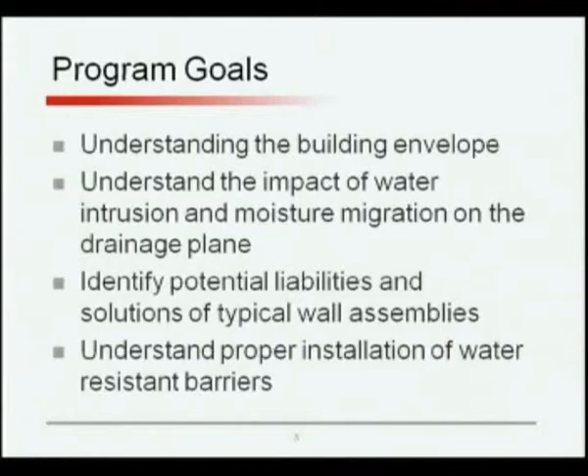Our goals today: help you understand the building envelope, understand the outside package of a home or any building, understand what water intrusion and moisture migration do to us today. Again, old houses, walls were kind of empty, a little bit of water might have leaked in, plenty of air blew through it and dried it right back out. The house was very sort of resistant to that, didn't care. Today it's a totally different deal.

Identify the potential liabilities and solutions for typical wall assemblies that we see when we're putting a home together. And really overall, understand the proper installation of a water-resistant barrier, or what we call a weather-resistant barrier, or WRB. I'm going to let Jim take over and talk to you a little bit about that building envelope.

Great, thank you, Pete. All right, a brief introduction to myself. I understand that Scott this morning had an introduction with our bios for both Pete and myself. My name is James Knapp. I work with Hallmark Building Supplies. Hallmark is an integrated system of sales, marketing, and distribution. In that company, I'm the Vice President of Construction Products. I've been with Hallmark for 22 years.

As a salesperson, I was one of the first persons in this market to have the opportunity to educate the building trade on using a house wrap. Back about 22 years ago, I can give you some data because I remember what it looks like. Less than 2% of homes were actually using a house wrap. A small percentage of that were using felt on the walls. Obviously, felt is used under the roof. Pete is going to kind of lay that out for us. Now, house wrap is standard building practice. It's just a standard building practice.

And through that process, we've educated a lot of people in the trade, including many of you, on how to properly install these products. The key to those products is being able to use a system of products that are engineered to work together, that chemically bond, to create a monolithic envelope which protects the builder's home, which limits the liability of everybody because it reduces callbacks.

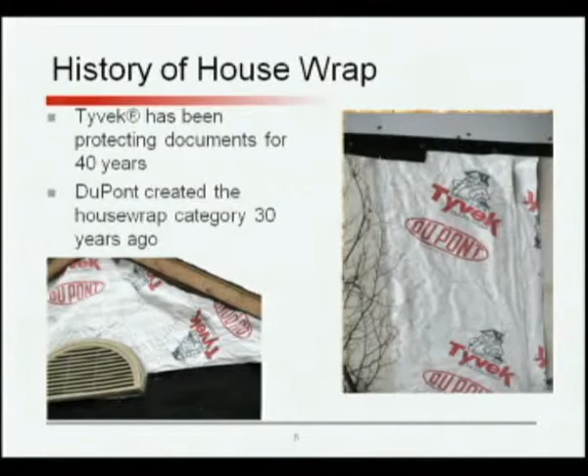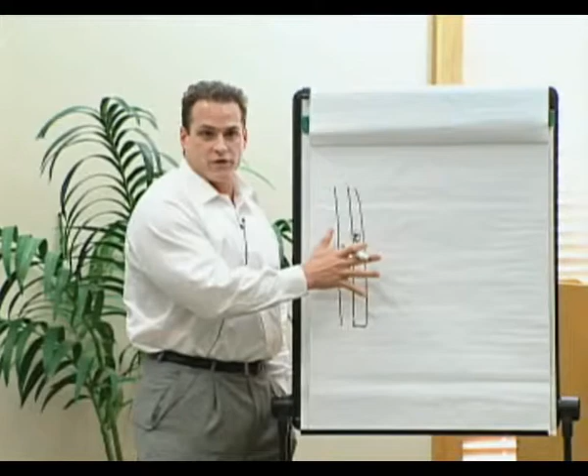Now here's where it was created. If you think about a wall, and this illustrates my wall, the house wrap category was created to protect that wall from outside air infiltration. And the belief was that if we wrapped our exterior wall, which was defined as our building envelope, we could protect the wall from air infiltration, reducing drafts, making the home more comfortable to live in by stopping air infiltration at its source, making the energy bills for the consumer a lot more comfortable to live with.

So for the last 30 years, we've been saying that this house wrap category will protect your building envelope, your wall, and reduce air infiltration. About 10 years after that, through innovation, house wrap manufacturers started seeing, since the number one callback in the building industry is water-related issues, that they could take this house wrap product, re-engineer it, and create a product that could resist air, resist water, and because it's moisture vapor permeable, which means it allows moisture vapor in a molecule form to pass right through it, it can breathe. It can stop air, resist water, allow the wall to breathe if moisture does get in, and we would have an air-water barrier and be able to solve issues for the building trade.

So in the house wrap category, really the job of this WRB is to stop air, resist water. But when you're stopping air and resisting water, the reason you don't want to wrap with a plastic film is it needs to be permeable. The higher the permeability, the greater the confidence in the building trade that moisture, if it does get into the wall system, is going to be able to escape.

Okay, so DuPont created that product. Now here we are today. There are about 70 products in the marketplace, choices of house wrap to wrap the wall. But here's what we need to think about. When you're looking to wrap your wall with a house wrap, a WRB, to create the drainage plane, the first thing you have to ask yourself in the trade is what type of exterior facade do I use? Because depending on the facade, house wrap manufacturers today are bringing more to you than just a house wrap. They're bringing products that actually provide thermal performance.

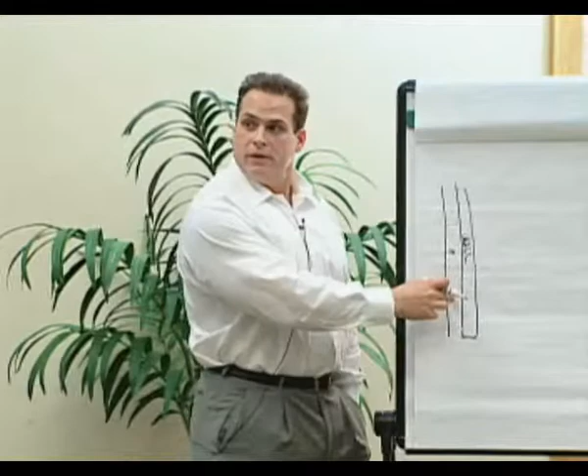Okay, the building envelope. For over 30 years, the building envelope has been defined right here, the wall. But actually, I can show you where it's going. I sit on the council for the leading manufacturer in this category of innovation and technology, and I can show you where it's going. Because for over 30 years, we have defined the building envelope. We taught the trade the building envelope was the wall. And we said, based on your wall, you need to protect your wall because it'll limit your liability by reducing potential water callbacks.

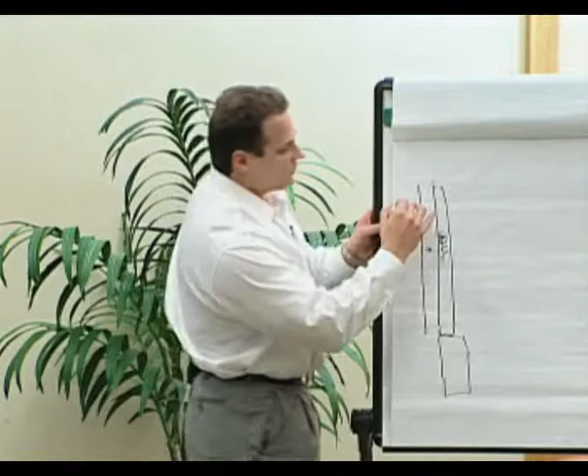Actually, now what we're realizing is that you guys are building a home as a system, or a building as a system, whether it's residential, new construction, remodel, or commercial. And as we look at that system, we realize that you're putting this wall on a foundation, and then this wall is also being capped with your roof. So we've got a foundation, a wall, and the roof. Here's where the category of WRB is going: weatherization systems.

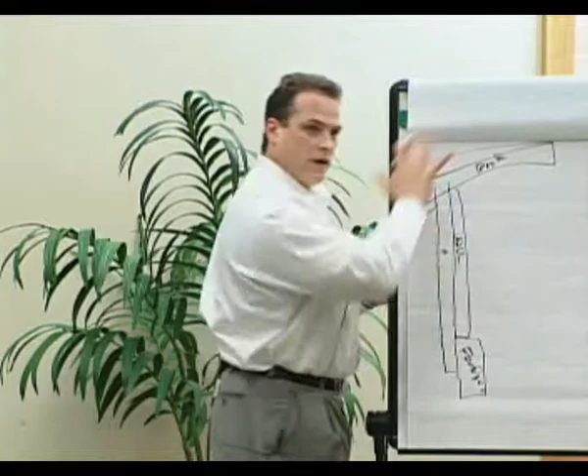For so many years, we told you, use this house wrap and it's going to protect all your callbacks, help you build a better wall. That's true, but I think where you're going to see this thing going is the building envelope, first of all, is going to be what is traditionally defined right now as the wall, tied into the foundation, the wall, and the roof. The entire building is going to become the exterior building envelope.

And where you're going to see these manufacturers start to bring innovation of products is based on the system of products that you're using. They're going to give you choices, like they're doing for the wall, to tie your foundation to your wall to your roof, and they're going to redefine this as the building envelope, the entire foundation, wall, and roof, and give you a system of products.

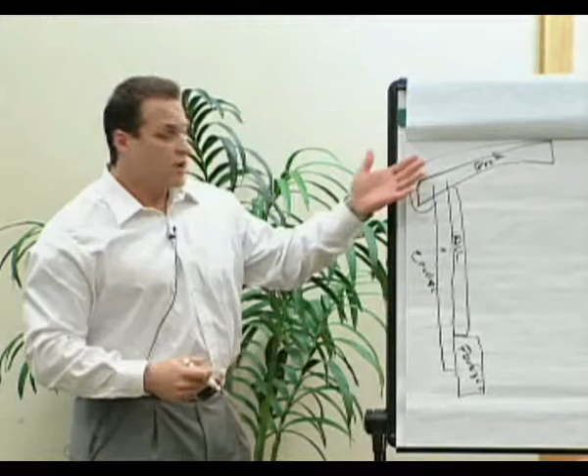There's already manufacturers that are bringing technology from Europe, and technology in Europe is actually using house wrap products that are metallized, thermal performance, because all walls in Europe are built with stone. They don't wrap the wall because it's built with natural stone, but they use this sealed attic ventilated roof as one of the first innovative products that came to protecting heat loss, energy conservation, moisture issues, ice damming, solving problems for the building trade. So again, the envelope is going to go from defined as the wall to the foundation, wall, and the roof.

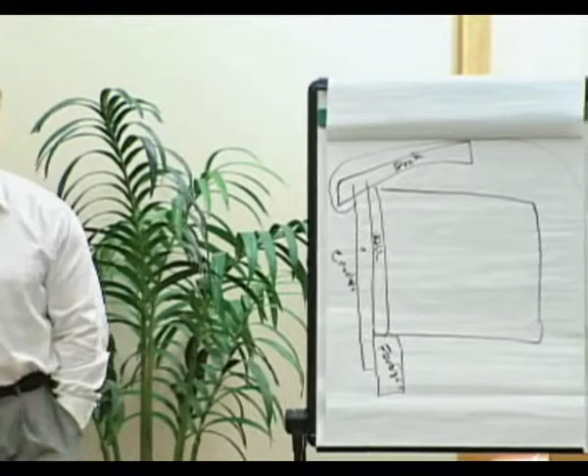Now what's been interesting here is what we realized is within this wall, the building industry is actually putting windows and doors. So for so many years, we would tell you, use a house wrap, wrap your walls, and we're going to protect air and water for you. And then make sure all these different people in the trade that touch that exterior wall properly install this stuff, which is really where Pete's going to tee this thing up and show us the proper best practice in installing these products.

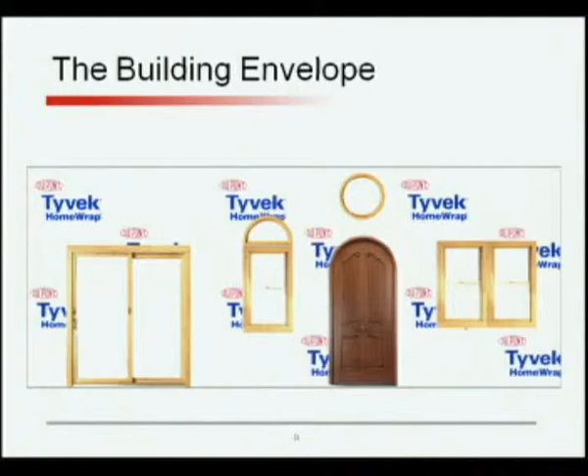But when we look at this, we realize that you guys are putting doors in, and you're putting windows in, windows with circle top or elliptical top or circle windows, and you're actually putting penetrations in that exterior wall. So house wrap manufacturers that once just brought house wrap as a WRB are now bringing a system of products. So as you look at your windows and doors, there's some questions that you have to ask before you just say, I'm going to use this flashing product, or I'm going to use this caulk to seal all those penetrations.

Because here's what's interesting. The average 2,000 square foot home has over 1/2 mile of gaps and seams where all these building materials come together. Because of pressure differences on the wall, air and moisture are going to pass through those cracks and seams and get into the wall system, outside of the penetrations that we're going to make here.

By choosing the right system of products from the top down of this building and protecting that envelope, when you get to your windows and doors, before you just choose a sealant or a flashing product, what you want to ask is, what brand of window am I using? What's the proper installation method for that brand? What's the width of my wall? Is it 2x4? Is it 2x6? Because that will change the window pan or different products that you may want to use.

And there's some windows that actually have a nailing fin. There's some windows that do not have a nailing fin, like a brick mold window or a brick mold door. House wrap manufacturers have actually innovated flashing products that create a window fin by simply using a flashing product. There's a product called Straight Flash VF that actually creates a window flange with a non-flange window and door.

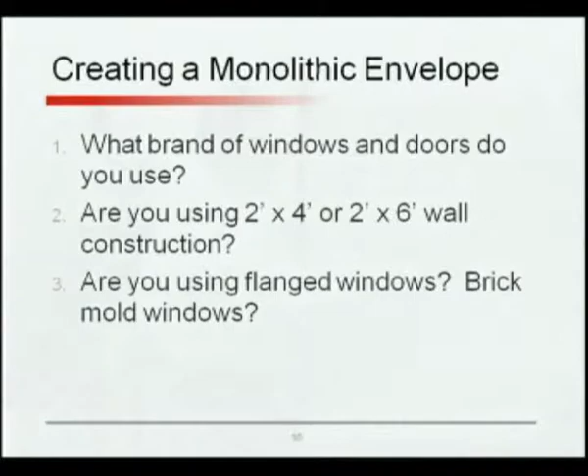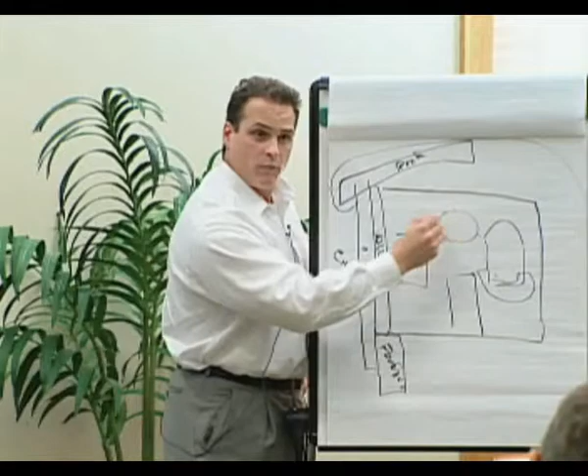There's three-dimensional products that can actually seal the bottom part of your window, because if water ever gets into a window opening, where do you think you find it? In the corners. So you can use a three-dimensional flashing that can literally protect the inside, the bottom sill, and the face of the window. Bendable, moldable flashings can do this circle or elliptical top window in one piece. They have flexible materials in them so you don't have to cut and piece tin flashing or other flashing materials.

You can, in one piece, go around these types of applications, protecting that. Now the value here, here's where I'd like to leave this part of my presentation and turn it over to Pete. Some things to think about. The building envelope is more than just the wall. Think of your foundation, your wall, and your roof as a system.

We all know that. But choose a system of products, because you can take a house wrap, a tube of sealant, a roll of tape, and a piece of flashing product, and you can put them together. But here's the key. They're not engineered to work together. Choose a system of products that are engineered to work together chemically, that chemically bond to one another, that protect your entire building envelope, that the manufacturer is going to warrant for 10 years, protecting you from liabilities of moisture intrusion, at the end of the day, saving us some callbacks.

Okay, I'm going to turn this over to Pete. He's going to walk us through the drainage plane and the proper installation of these materials, because that's the key to making all of this stuff work. Thanks, Pete. Thanks, Jim.

Like Jim said, a product alone can't solve a problem. And like I was talking about, years and years ago you had fewer people involved in the construction of a home. You typically had a master craftsperson that understood various phases of construction and could handle the transitions when different materials went together.

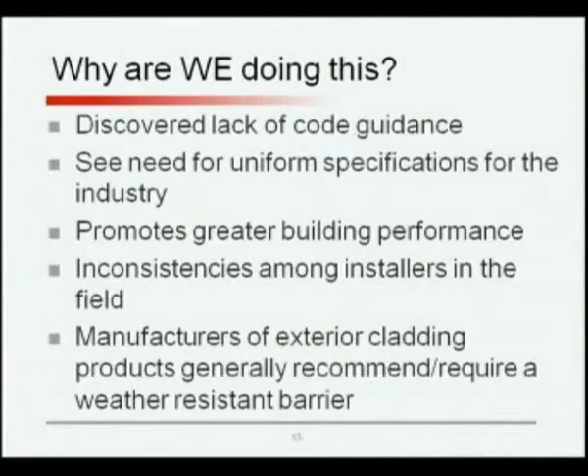Why did we do this? We're going to go through a series of slides from a panel I sat on here at MBA 2 years ago, where we put together what we called a weather-resistant barrier guidance document. We submitted it to the Department of Commerce in the state of Wisconsin because they were considering adopting some code language to mandate a weather-resistant barrier. Is there a weather-resistant barrier mandated by the Wisconsin Residential Code right now? Who knows? There is. You have to have a weather-resistant barrier behind your siding or cladding materials today.

Do you know what the acceptable form is? We should know because we see people doing it every day. Foam sheathing with taped seams is okay. And what we decided as a panel was, we as builders have seen enough problems with foam sheathing with taped seams, because tape doesn't stick forever in those assemblies, that there probably needs to be something more prescriptive. There's been nothing adopted by code.

Commerce is considering adopting some of this by code, but the next series of slides is really what we put together and presented 2 years ago, really best practices on how to create a weather-resistant barrier. There's no guidance in the code right now. There's no uniform specification for the industry. We wanted to make buildings perform better.

Big thing, inconsistencies among installers in the field. We've got lots of different people involved in building a house. Depending on which state you go to, it gets even more specialized. You'll have one person put the studs up, one person put the sheathing on, another person put the house wrap on, a fourth person put the flashing on.

And again, the next guy in doesn't know what the last guy did or really isn't concerned with what the last guy did. The next guy in's here to put his stuff on, and that's where we get into problems because there's not one uniform understanding about how all these exterior products interact. Manufacturers of exterior cladding products generally recommend or require a weather-resistant barrier.

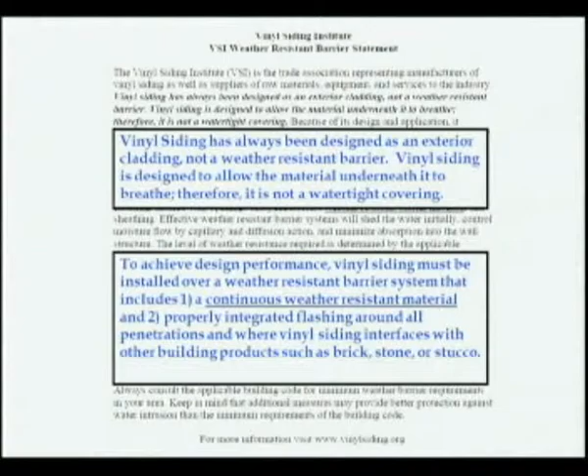And so anytime I get a service call and a customer says we were having Thanksgiving dinner and a storm blew in and my dining room window is leaking, well, we'll send somebody out. They just lean a ladder up on the outside of the wall and try to caulk the siding or anything to the exterior. They're not attacking the problem where the problem exists, because the cladding is going to leak.

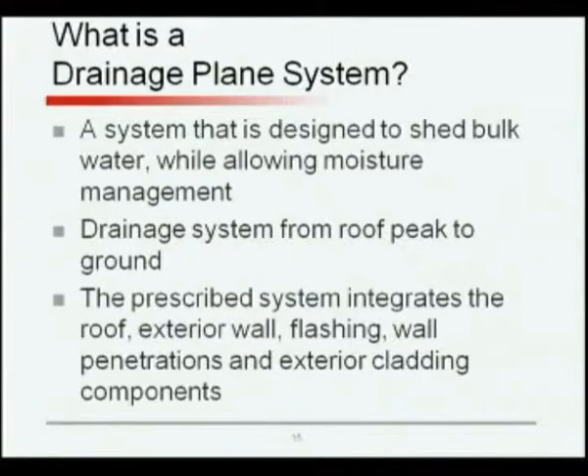What's a drainage plane system? A system designed to shed bulk water while allowing moisture management from the roof peak to the ground. Like Jimmy said here, for years and years and years, we've told you how to be a smart builder by showing you a wall and putting some wrap on the outside of it. Problem with those homes is they're really dark inside. We're not dealing with reality when we draw a wall this way. There's holes in that wall, and customers pay more when they're beautiful looking holes in the wall. We've never taught you how to do that.

And there's a place up here water's going to get on, and there's a place down here water's going to get on. So a system from the roof peak to the ground, integrating roof, exterior wall, flashings, penetrations, and cladding components. If we could build a wall like this and put some paper on it and never touch it again, we'd have leak-free homes. The problem is we build that wall and then we gash it full of holes. And it's how do we deal with the holes and how do we anticipate what the water's going to do.

That's where the water's going to go in. Came in our dining room window. You know, it didn't just magically appear in the center of a wall where the wall was nice and solid and built like this. It came in through the holes. We got to manage the water around the holes. Good weather-resistant barrier, dams or obstructions, free flow of water, weep holes in masonry. These are some of the features we're going to talk about as I get into some of the picture slides to show you how this stuff works.

Types of building wraps. I just want to say this. If you want to know how a drainage plane is supposed to work, just get up on the top of the house. It amazes me that we understand so well in Wisconsin how to make water hit the top of a roof and get from there to the ground. And suddenly we take that roof and we make it a vertical plane and we totally forget everything we know.

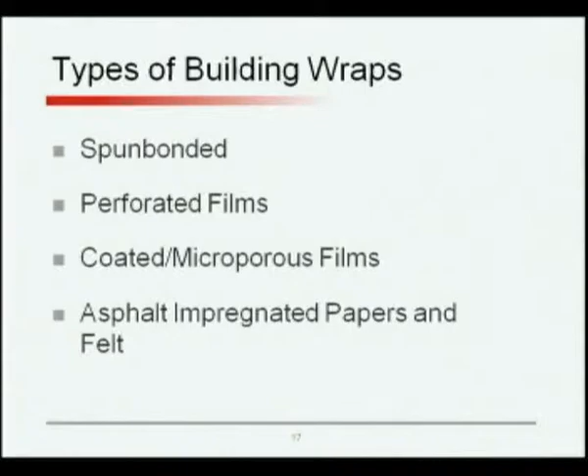What kind of building wraps are there? Again, we'll go back to this. Well, why house wrap? Well, because houses are put together, the walls are sheathed with pieces of stuff. It used to be shiplap or tongue and groove, lots of pieces of board on the outside of the wall. Now it's pieces of OSB or foam sheathing, but they're separate units. They're 4x8 sheets, and we need something continuous. We need a plane. We need a flat surface for water to run down and not get into the building. So the best way to do that's with some sort of wide or long paper or rolled material.

So that's where felt paper came in. 3-foot rolls, put it on. Again, as long as you shingled it properly, we're okay. And if you're going from the bottom up, you can generally achieve that proper shingling. So asphalt impregnated papers and felt, still a viable material. We're using it on our roofs. We're getting our roofs right. We usually don't have a lot of roof leaks around here. We have a lot of wall leaks around here.

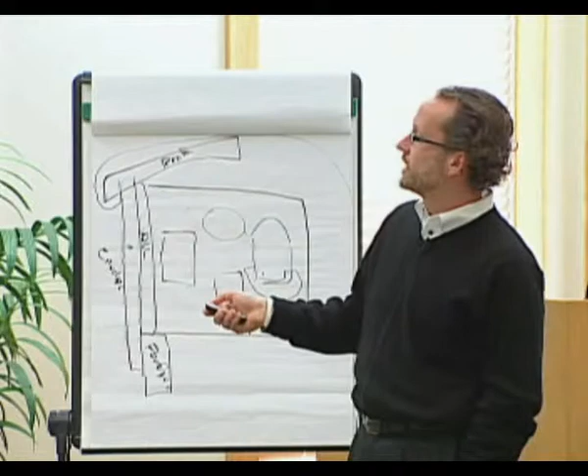Spun bonded house wraps. Tyvek happens to be that category. There are a lot of perforated wraps out there that try to address some issues. And then the coated, like metallized or microporous films. So there's lots of different wraps you can use. I recommend using a wrap. The problem with foam and tape is there's not really any tape that stays stuck to foam in the long term. And ask any sider who's gone back to repair a window leak on a house that's got foam and tape, and the tape is all curled up inside the sheets of siding. Presto.

Material selection and wall design, first step. Here it says, the best workmanship by the installer and the finest quality control of the general contractor will never rectify poor selection of materials and improper detailing. I agree with that, especially the proper detailing. Once again, the finest selection of materials, the most premium paid for house wraps and their integrated flashing systems and their high-tech sealants that chemically bond. If we don't know how we're putting them together, it's junk. Or if we don't use the whole system.

I can't tell you how many job sites I've been on, and there's a couple of rolls of some tapey-looking stuff laying in the back corner of the garage. The flatwork contractor gets there, throws them out in the snow. Well, what are those? What are they for? The building's already sided. We got guys smiling. You've seen it. You paid for it, too, right? You bought it in your bill of materials, and now it's out in the snow. Well, we didn't know what it was for. We thought it was extra. We didn't know.

If the stuff's not put together properly, you can pay all you want for a system. You can rip an ad out of a magazine on your way to Vegas this January and go, ha, that's what's going to solve my problem. You can start buying the stuff, but if your guys don't know how to put it on, how it interacts with the rest of the system, you're wasting your money, and you're going to have callbacks. So best workmanship and finest quality control never replace good materials. Best materials will never replace good workmanship either. So it's got to go together.

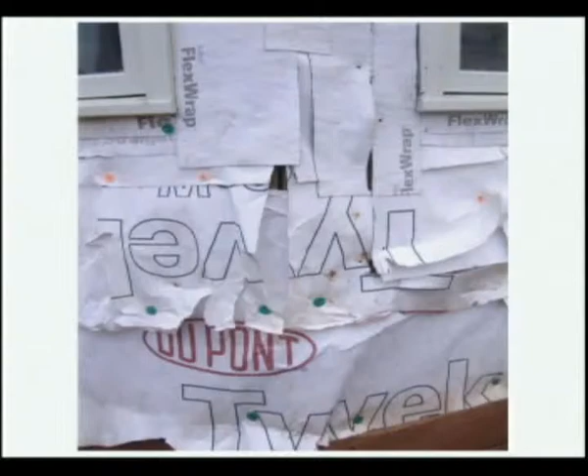Now we get into the fun part. The pictures, sort of the builder porn here. Here we go. I got Tyvek, I got FlexWrap, I bought the best system. What's the problem, though? The problem is this job is often relegated to more lowly skilled persons in the field. You know what? You just came on with us for the summer. I tell you what, your job's to go around and tape all the windows. Can you handle that? Can you not kill yourself taping all the windows? You know what? Your job's to look for missing pieces of Tyvek, cut a piece and put it back in. So we give this to a junior person, and this is what we get. Yeah, it's patched up pretty good.

I got her done. I even used the fancy, expensive cap nails that my salesman told me I had to use, right? He gave me the gun as long as I bought those fancy nails. That isn't going to work. That's not a plane. So when we're talking about a drainage plane, it's got to be flat. It's got to be smooth. If water will run down it in smooth fashion and glide down it, you've got a drainage plane.

If water's going to get hung up in different cracks and crevices, the problem with Tyvek, it's waterproof on both sides, man. So when water's behind it, now it's held in the building. It's waterproof both ways. So it's got to stay on the outside, on the business side of the Tyvek. Once it gets on the inside of the Tyvek or any building paper, now you've just given yourself a worse problem. Our company resisted house wraps for a long time because we said, if you don't put them on right, it'll actually exaggerate a leak. If it's not done right and it's not a complete system, it'll actually force water into your building.

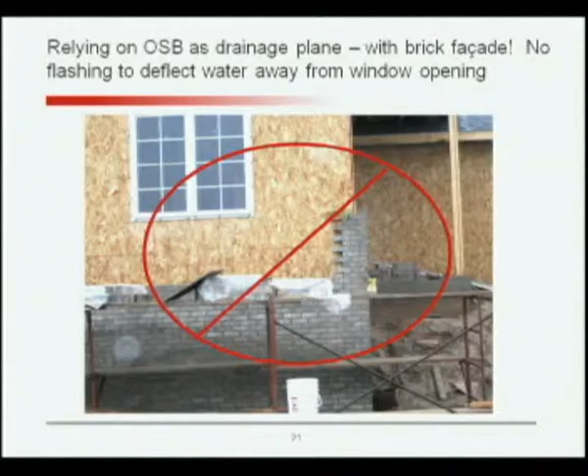Don't ever do this. OSB is not a drainage plane. It's pretty flat and smooth, and it's kind of like got a smooth glue surface when it comes out of the mill. I can't wait to see what this looks like when this building is torn down. It's gray fuzz, gray fur. Water cannot run down the wall. I'm putting brick on the outside of it. Brick leaks. Brick is porous. Water gets behind brick. Brick was designed years and years ago and set up to where we held it away from the outside wall.

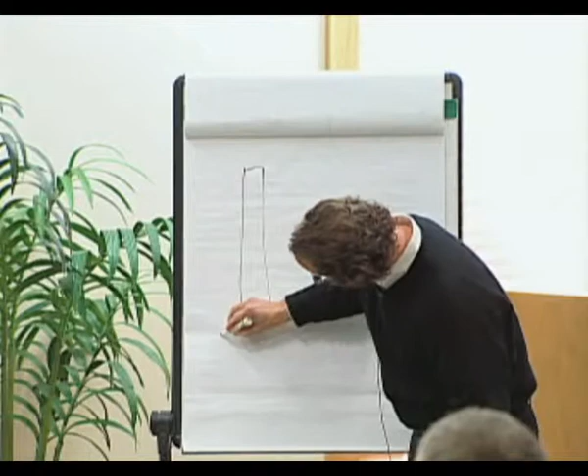There's the marker. Everybody knows this. Here's the wall again. Right? No windows, no doors, no nothing. And then I've got my foundation and brick ledge out here, and I'm stacking masonry up like this with what? That nice 1-inch airspace. And years ago, guys might put a piece of lumber in there and drag it up as they went course to course so that the inevitable mortar droppings squishing out the backside of the brick didn't fill this airspace up. You think that's happening today?

No. So essentially what you're winding up with is brick and a mortar-filled space behind it, and this stuff is completely porous and water wicks right through it when it gets wet, and that OSB gets wet, and that OSB turns black, and that OSB rots, and it is not a drainage plane. There's no flashing system around that window. That's a very recent photograph.

Where'd the cap go? I'll just sit here and sniff the marker for the rest of the class.

Relying on OSB as a drainage plane with a brick facade, no flashing to deflect water away from window opening. So even if I did have building paper here or some sort of a weather-resistant barrier, I'm going to have problems with that window because it's not integrated with the wall. It's just slapped in the wall. And this ain't a cheap house, guys. That's a lot of money.

OSB, right? So I've got a material that just should not get wet, period. The end has to be protected. So I've got an OSB gable end, bare naked behind vinyl siding, water running behind it, and then reaching this wonderful situation, and we wonder why our customers are calling us with window leaks. So if you're going to use this, go all the way. Make a flat plane, cover it with a properly shingled... this is upside down, this is upside down.

Here we go. Here's a piece of metal drip edge over maybe a ledger board for a deck or some sort of projecting trim. This is a big problem, right? Carpenters come on a job, frame the walls, sheet the walls, roll out the Tyvek, tip the walls, put the windows in, they're gone. Who comes next? Well, usually some kind of sheet metal guy. Maybe my tinner comes to put gutter flashings on, etc. Flashings come. Well, the Tyvek's already there. I can't shingle this properly.

This is happening every day, and we can't throw up our hands. This is backwards. Water's going to run down the face of this, and water's going to run behind this. This flashing that I paid a lot of money for has been defeated, and in fact is now the thing that's holding water inside my wall, letting water behind that piece of trim instead of down the face and over that piece of trim.

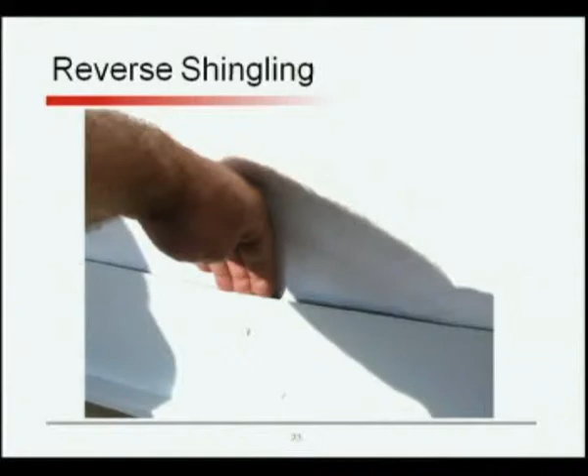Well, how do you solve that? Do you have the tinner come first? Not usually. But the tinner's got to understand he's got to slice that weather-resistant barrier. He's got to curl it back up. He's got to put his tin on, and he's got to lay that back down. It can be done. I'll show you examples of it being done. But we can't just walk away from this. We can't just go, well, I don't do it in that order.

There's been some talk. You go to Texas, there are house wrap contractors. All these other dudes come and do their thing first. Framers, sheathing, windows, tin, everything's done, and then a contractor comes and puts the house wrap on. That would be a great way to do it. We probably couldn't afford it, but that would be the way to do it. This stuff should be on here last so it can be lapped properly. But there are ways to still achieve it.

Just because I do things in a different sequence doesn't change the laws of physics. It doesn't change what the water's going to do. The water's not going to listen to the way I do it. The water's going to follow physics. Here you go again. Hey, go fix the ripped pieces of Tyvek. It can't go on over the face. Now water's behind it. Now it's driving water in.

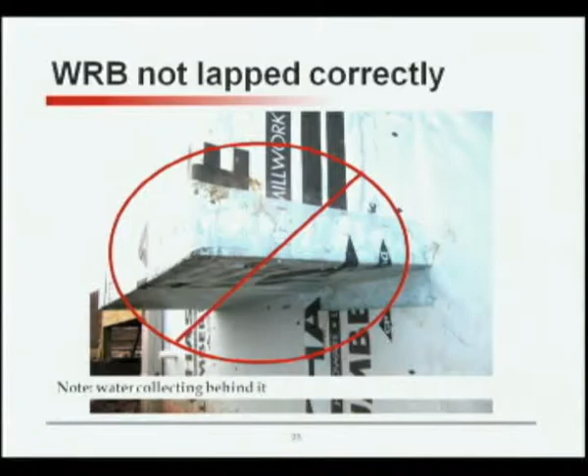Same thing. I've got a mix of materials. This stuff lapped up over the bottom of this cantilevered chimney chase with the top edge exposed. You can see the water dripping out of the bottom of it. Now it's holding it in. This is a reside of a 10-year-old home. No wrap used, no window tapes used, raw OSB. Here's what it looks like. Here's what it looks like when it gets wet. It sits back there in the dark behind our siding, staying wet most of the time. That's what it ends up like very soon.

You've all seen it. You've all seen the guy that ran out of money and his house sat there with exposed OSB for what, 3-4 months? It's starting to turn black. And that's with the sun drying it out. Imagine what it looks like now back in the dark behind the siding. It's a mushroom farm.

These big gaps here between the sheeting and, again, this rim joist, that doesn't create a plane. You all know if you try to pour a pitcher of iced tea too slowly, the iced tea curls around the spout and runs down the side. That's the same principle when you've got this big gap. It's running down the face, and now it's curling underneath that spot. It's going in. You can't change physics. All the product manufacturers in the world can't change physics. We have to respect and obey physics.

Here we go again. My carpenter sheeted the gable ends. Now my roofer came. My roofer put the tins on.

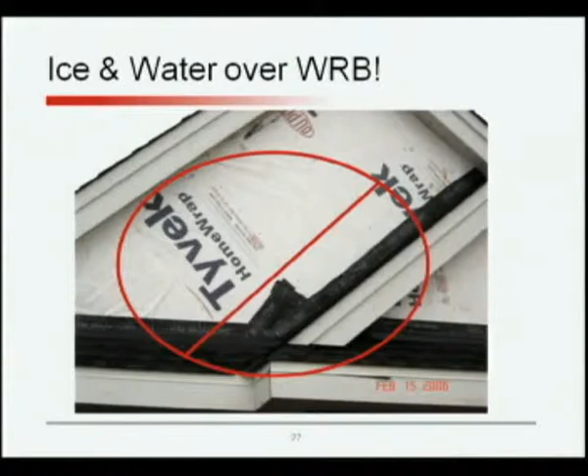He put this really expensive, really nice Grace Vycor Plus over the face. Now one could argue that if that top edge stayed stuck just so and never let go, I might get away with it. But the point is, we're reverse shingling. You would never do that on a roof. Never, ever, ever do that on a roof. You'd do it this way on a roof. By nature. By common sense. By our DNA, we do it this way on a roof. We get to a wall, and we think this is okay.

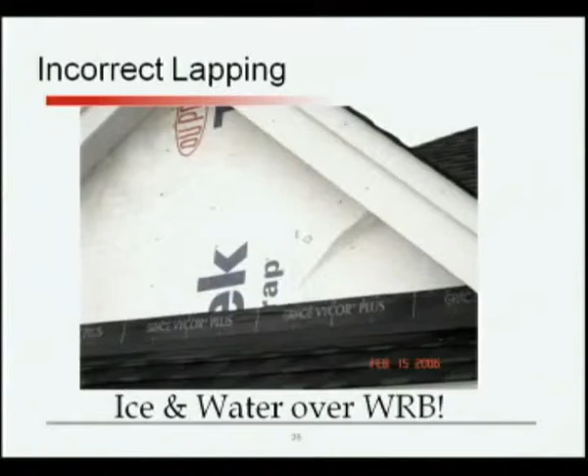Slice the house wrap, peel it back, put those tins and tape on, lay the house wrap down over the face so the very face material is lapped and shingled properly. Same stuff. Yeah, this stuff is super expensive too. And it's super excellent product. But it's in the wrong order. It's on the outside.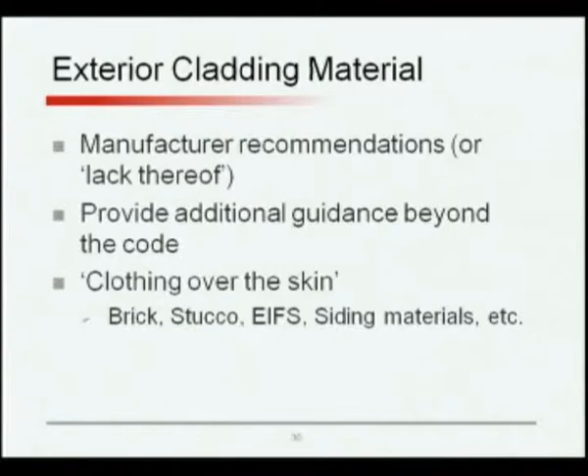This is, again, this guidance document we created for Commerce. And you know why Commerce can't adopt it, and why we knew that while we were writing it? Because how do you inspect for this? At what point do you do an inspection? Do you have a drainage plane inspection? Well, I get my rough framing done before my flashings go on, before my sider puts a lot of the flashings on, so he would need to be there. It really became a practicality issue. So we couldn't just make the state the police person of this process.

We have to take responsibility as craftspeople, as those master builders out there in the field. We have to take the responsibility and do this because buildings are going to fall apart if we don't. Customers are going to have a bad experience with water in their house if we don't. And as Jim said, that is the #1 callback and complaint, period. That's the problem, water getting into the assembly. So it's not impossible to do, but we got to think like the roof.

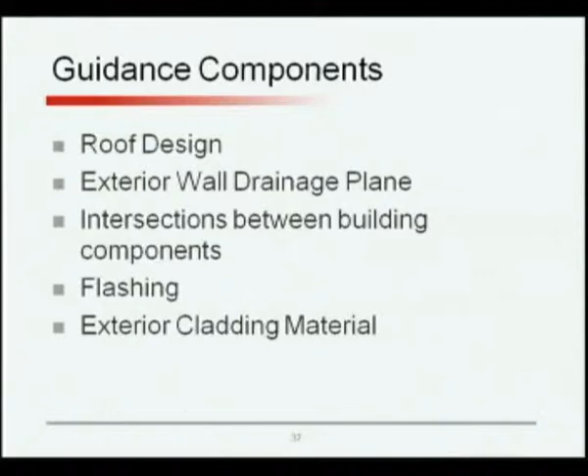So in here we're going to talk about roof design, the wall, and most importantly, how things come together. Flashing is used a lot of times to bridge those interfaces between dissimilar materials. And we'll talk a little bit about the exterior cladding. The real thing you need to know, they all leak. And there are different applications depending on what you're going behind. Like Jim said, if it's a cladding that's going smack tight to the wall, I don't have this drainage space that I was talking about.

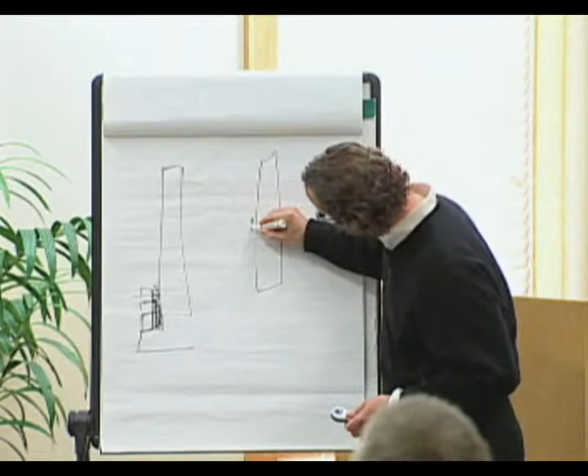So not only the drainage plane for the water to run down here, but the drainage space. So whatever my cladding is out here, I got to assume water's going to go behind it, and I got to give it some room to do it. If I'm using a type of cladding that gets plastered right to the wall, there's not enough space. So these crinkled wraps that are starting to come out create that. By their crinkling, they create space for that water to run, hit a flashing, and get to the ground.

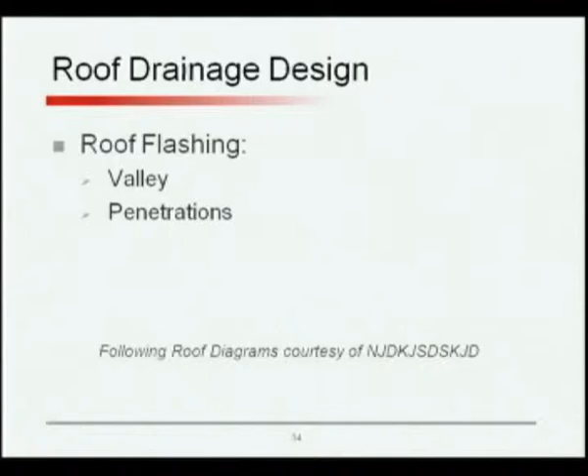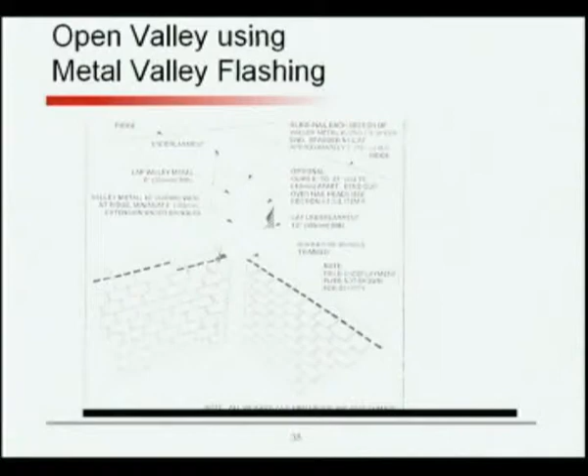Roofs. Again, we all know this. I don't know who that is, but that means we're not naming the source of our roof diagrams. We all know this in our DNA. We just really do. Underlayment properly shingled, metal in the valleys if you so choose, some other kind of material in the valleys that's going to...

Wow. That's it. Thanks for coming. No, we didn't properly credit the source of our slides. Yes, sir.

Wow, great question. It can be put on by staples, it can be put on by cap nails, but there are some requirements and guidelines as to your fastening schedule. Too many fasteners, and again, we give this to the junior member of the crew. What's their logic tell them? Hey man, a few nails is good, more nails is better, right? If you don't know how to tie good knots, tie a lot of knots.

Not good. The other thing, especially with a pneumatic stapler, where the drive can be set. A stapler that's too aggressive, a nice wide crown staple, foam sheathing, bashing that house wrap in, but actually bowing it back, creating a little funnel and a divot in the plane, bad stuff. So staples have to be applied gingerly. They got to be applied to a flush depth, but not further, and too many can be bad.

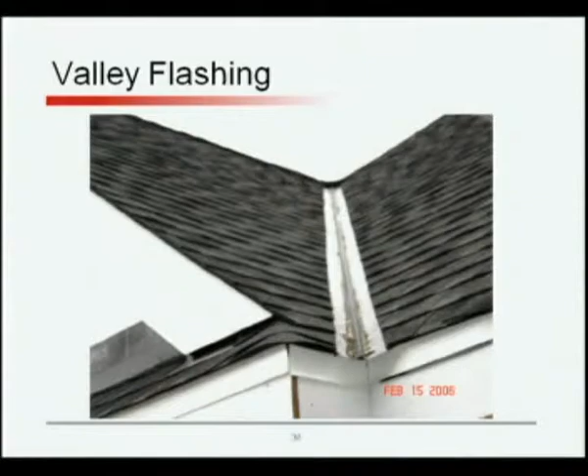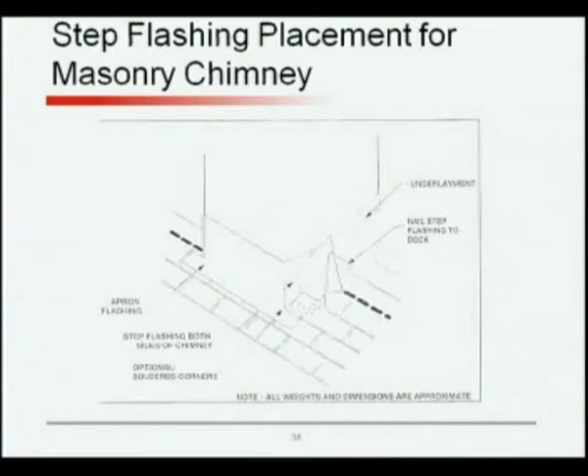Not correct. See it every day. I send photos to the Tyvek people every day. Are you training these people? You're selling them your product.

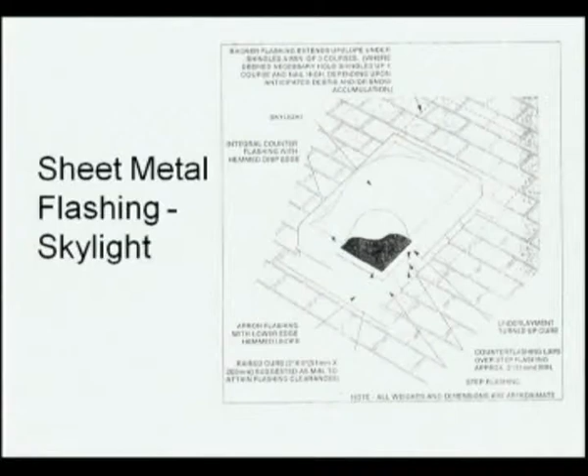Here's a wonderful skylight. Not seeing as many of these. And again, you guys will have copies of all of these in your slide packet, so I'm not going to take a ton of time. All showing proper lapping technique. The reason we have so many roofing examples is because we just fundamentally get it on a roof. And if we would just build a wall the way we build a roof, we wouldn't have any problems.

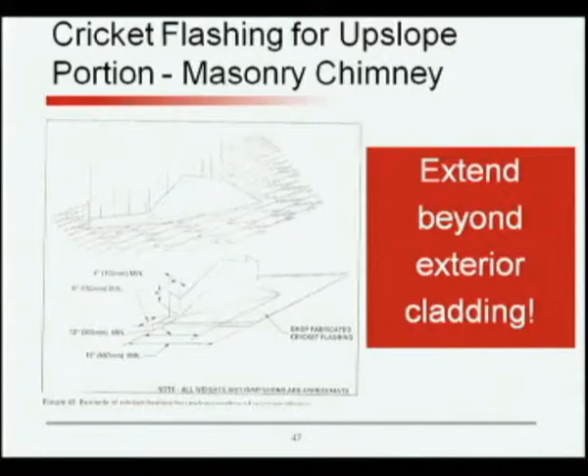Here's a saddle or cricket on the back side of a chimney. Nicely done. Again, my weather-resistant barrier should come down over these flanges. I learned at one home building company something you can really, really help yourself out with if you're in these kinds of situations. Oversize your cricket by a foot. Take this thing and run it 6 inches past the side of the chimney on both ends. You don't have a lot of margin for error.

The water that hits the cricket now has got to get and run right along these tins, and it's still running along the bottom edge of this chimney. Who says you couldn't just build your cricket? So from the back side, yeah, you'd see a little triangle either side of the chimney if you looked at it from the ground. But now that water flow is directed out here 6 inches away from both sides of the chimney. Simple solution.

Intersections between building components. Again, one solid wall, duh, we get that, easy. The problem is our houses are built out of a whole bunch of different stuff. Okay, the famous roof line running down an intersecting wall, garage roof against the second floor wall of a two-story. We all picture it, vertical wall, roof running down, baby tins coming to a bottom edge, there's going to be a gutter here. How many times I can drive 2 minutes away to a neighborhood, vinyl sided home, and there's this ugly black line going down the siding right here.

Because this flow of water that's running down the tins is running straight down, misses the gutter end cap, because the gutter end cap's a little bit away from this wall, misses that, sloshes down the vinyl siding. Who's seen it? Anybody seen it? The kick-out flashing. It's just the last tin with the bottom leg of it slit, and the tin is folded. Now we cut a vertical slit in the vinyl siding. It sticks out. The water now hits this kick-out, and it's dumped into the gutter 4 inches away from the end.

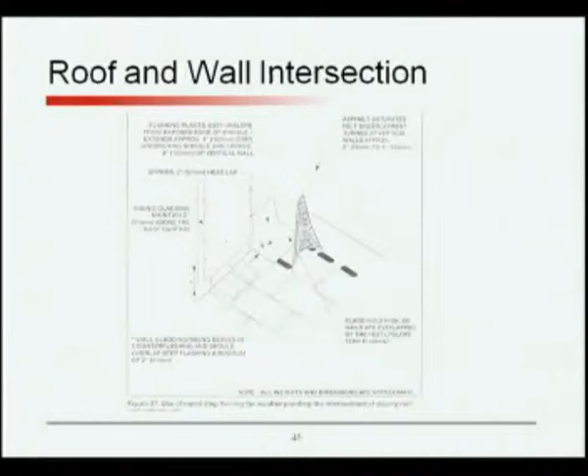Roof and wall intersection, once again, tin shingles, weather-resistant barrier down over the top of the tins, roofing down over the top of the tins. Roof to dormer, same concepts. Again, you have all these slides.

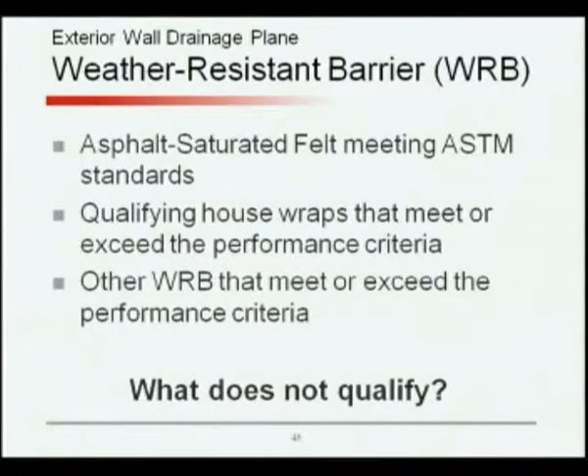What is a weather-resistant barrier? Now, this is cobbled together from a few codes. There are some codes. There's some state codes. There's some national and international codes that actually specify it. Wisconsin doesn't. Right now in Wisconsin, you're totally good to go foam sheathing and tape the joints.

But borrowing from some other codes, felt, meeting ASTM standards, perfectly fine. Lap it properly. Qualifying house wraps that meet or exceed performance criteria. We chose some performance criteria. Or other WRB that meet or exceed the performance criteria. We're not sure what those might be, but basically your performance criteria, there's two. One's a water holdout.

So I take a sheet of this stuff and I spray water against it. How much goes through? Because some goes through, but how much goes through? And we want that to be a minimum amount. And then the other one of these is vapor permeability. If I do get water into the wall and then it dries and it turns into vapor form, like Jimmy said, molecule form, can it get back out?

And there are not very many house wrap products that meet both. Bulk water, liquid water, rain can't get in, water vapor can get out. Vapor permeable, hydrophobic. So we set a minimum of 5 perms so that the vapor can get out. It can't be less permeable than the sheathing material, or I'm still trapping water vapor in the wall. Much less of a concern to us.

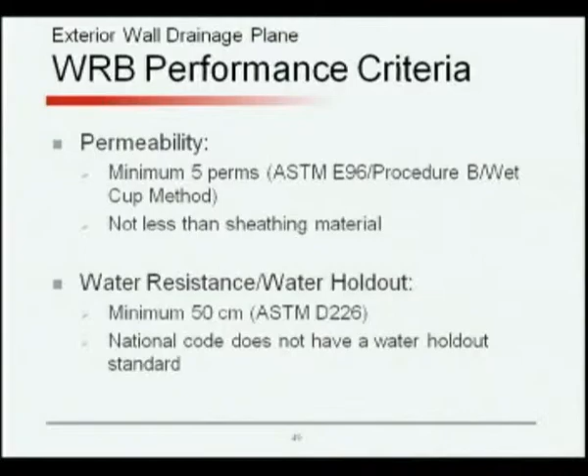Years ago we talked about, oh, you know, you got to let the vapor out of the wall. Much less of a concern to us than keeping the bulk water out. That's by far responsible for more of the moisture, translate mold problems in new homes, is liquid water getting in, not the vapor that we generate getting trapped in the wall assembly.

Now, it might get into a cold corner in a closet and make mold on the drywall, on the inside of the room, but the stuff inside the walls, the horror stories, we tore the wall apart, there's black fungus in there, that's because of rain. That's not because I cooked spaghetti and my house was too tight.

But we talk about this, and I don't even know what the units are. If you're interested in those codes, again, National Code doesn't have a water holdout standard. We chose that as a standard, kind of reviewing several different codes for this weather-resistant barrier. There are a few house wraps that meet that.

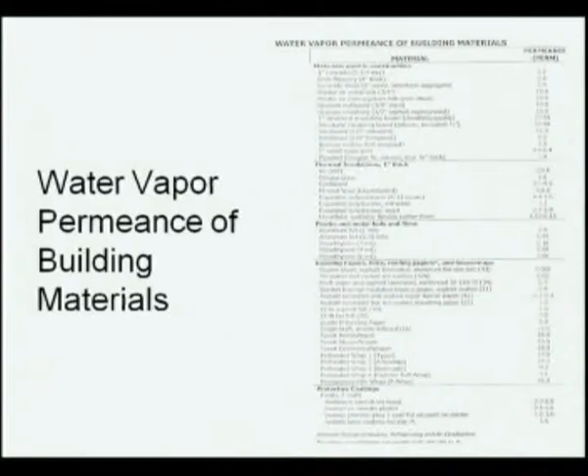Here's all your permeance of building materials. Again, a chart that you can review in your materials. But it's kind of interesting to look at some of these things. Coated vapor barrier paper. Huh?

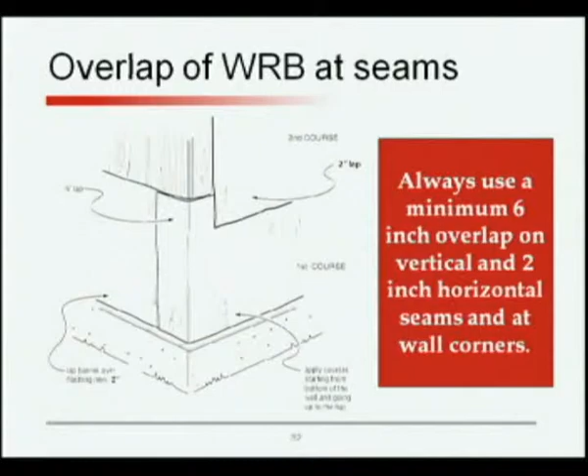2 inches, 6 inches. Told you that before. Starting from the bottom and going to the top, then you're going to guarantee this lapping is happening properly. And it's never the initial application that's the problem. We work from the ground, we work our way up, they're lapped properly. It's the stuff that somebody forgot. It's the, we forgot this window, we had to go back and add it. Or we ran out, we had to go back. It's the stuff that happens after the fact that, well, I just patched it over the top, and that's where I wind up with these upside down lapping kind of situations.

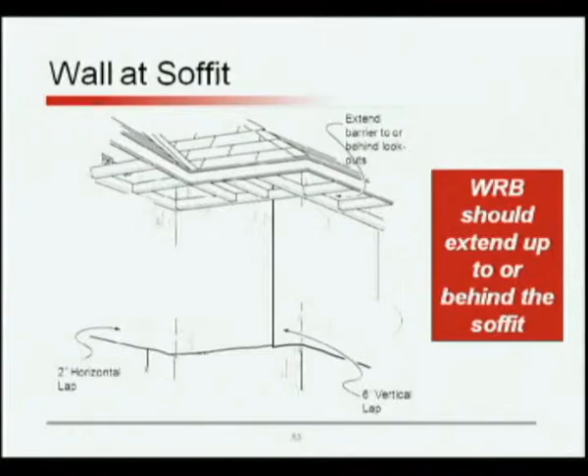All the way up. If I got a porch extension or something, I got to get all the way up, at least behind where that's attached to the wall. Again, here's your 2 inch, here's your 6 inch laps. Up to or behind the soffit. Oh, we sold 9-foot first floor walls on that job, and we only buy our Tyvek in 8-foot rolls. Okay, put the top piece on last so you're lapping it properly. Get it all the way up to the top of the wall.

It's got to come all the way down over your wall-to-foundation interface. This happens to be a fiberglass drainage board that's used both for insulation and drainage. Usually we're going to cover this with some sort of a decorative material, gray sheet metal or gray plastic, to make it look like exposed foundation. That's got to lap down over it.

It's blowing in the wind. It'll make it. It'll make it.

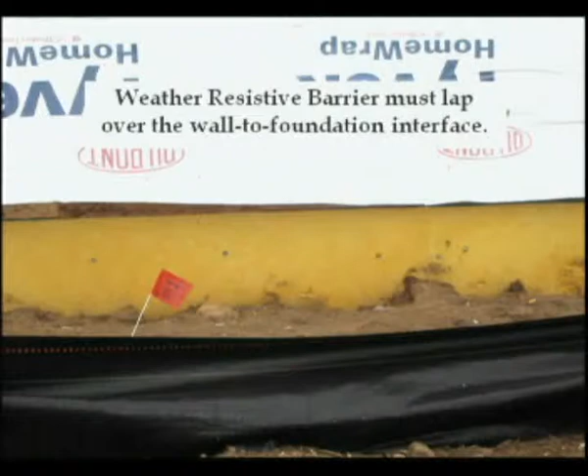It's got to lap down over it so that water's directed, again, to ground. Here's a roof-to-wall intersection, same slide we saw before. There's that kick-out flashing. There it is in an EIFS application. It's not that ugly. It's not that stupid looking, especially when you know that it's there to keep water from behind the EIFS, especially EIFS of all claddings, which we know if water gets behind it and freezes, the EIFS just blows up. So this is extremely critical here. But that's what a kick-out flashing looks like in real life.

Here we go again, expensive stuff and lots of it. Oh, look how high I went up the wall with the ice and water, boss. You proud of me? Well, kinda. And then I put the metal on the outside of that, and I see that every day. That system is inside out. Well, I wish these two guys could have been here first, and then the Tyvek could have come later. But in reality, we know that's not true. Our framers are putting the Tyvek on. It's the most efficient way to do it. You got to cut a slice right down here at the roof plane, then put this stuff on, then let the Tyvek lay back down over it.

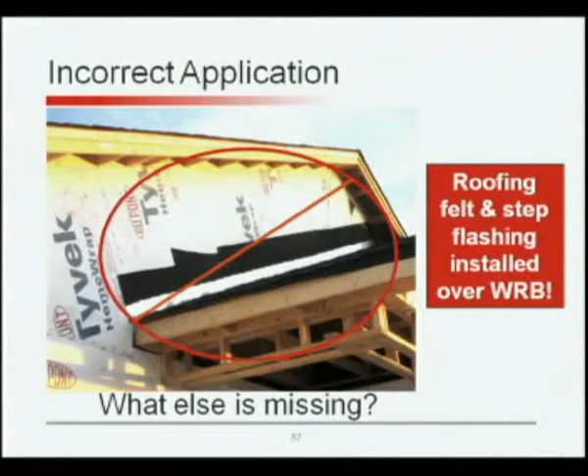Wow, I don't know if I could make a statement like that, but whatever you're using for your weather-resistant barrier should be lapped and shingled properly. Not this. This. I might think about that. Come from here down and just put a layer and create a new drainage plane. Basically abandon this one.

This is probably pretty functional. I might think about taping the top of these. And then I'd start right here, right from underneath the overhang, and drape a new piece down that's lapped properly. Yeah. Instead of do your best and caulk the rest, and, well, you know, give us a call if there's any more problems. I mean, it's a drainage plane problem. I would create a new drainage plane.

I'd create a continuous, smooth surface for the water that's going to go behind that cladding material to run down. And it can run all the way down over the top of those tins, hit this roof line, hit my kick-out flashing, get in my gutter, and we go on with Christmas dinner. What else is missing? I don't know.

Okay, here's a fuzzy photo, but here's where they've actually curled that stuff up, put those tins on, it's ready to be curled back down. Here's another good example of it. They've actually sliced the Tyvek, picked it up, put their stuff in place, and the Tyvek will lay back down.

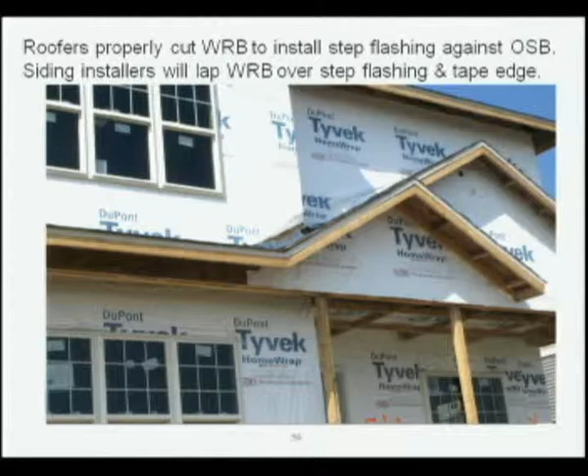I'll say in practice, the one person you can get the most help from in life with this stuff is your sider, the person that's putting that exterior cladding on. You can charge them with being sort of the watchdog for improper applications of this stuff. We always had a rule in construction that by covering up somebody else's work, you sort of implied that you were okay with it. You sort of took responsibility for it.

You put drywall over crappy framing, you bought it. You put siding over a leaky wall, you bought it. You accepted it as an acceptable place to put your material over. So I think if we invoke that kind of theory and say, look, if it ain't right, don't cover it up, especially with an exterior cladding, because it's only there to look nice.

Tell the sider, I now absolve you from all responsibility for keeping water out of my homes with your material. But if you're not satisfied that the stuff that's there before you is going to keep water out, don't put your stuff on, because I'm hanging you for it if you do. You can have your sider have a roll of that compatible tape that goes with your choice of weather-resistant barrier. Supply them with that for free.

And say little holes, cuts, nicks, tears. I mean, your men are 8 inches away from the wall going up a pump jack looking. They're inspecting it more closely than anybody ever will. Here, I'll give you 20 rolls of this tape, please. If there's holes, nicks, cuts, rips, whatever, tape them up. Use the right tape. Tape them up for me as you go.

Is he going to charge you for that? Not if you don't have him go back to fix leaks. So that person can be a critical player on your team. They'll be the last eyes looking at that weather-resistant barrier before it gets hidden behind the pretty stuff that leaks.

Once again, we're all good at building a flat wall and putting paper over it. Maybe we put some holes in it with staples, and maybe we put some nicks in it, we tape them up. But what about when we got to cut big holes in it and put beautiful, expensive windows through, and we don't want to leak at Thanksgiving dinner? Penetrations. It'd be so much easier if we just built houses without windows. They'd be more energy efficient, they wouldn't leak. It'd be kind of dark and dull.

Again, this is a standard that this panel that I sat on wrote for the NAHB. This is best practice. Equal to or greater than a 2.5-inch diameter hole. So equal to or greater than a 2.5-inch diameter. We're talking your sump pump discharge, what's that, 1.5 inches?

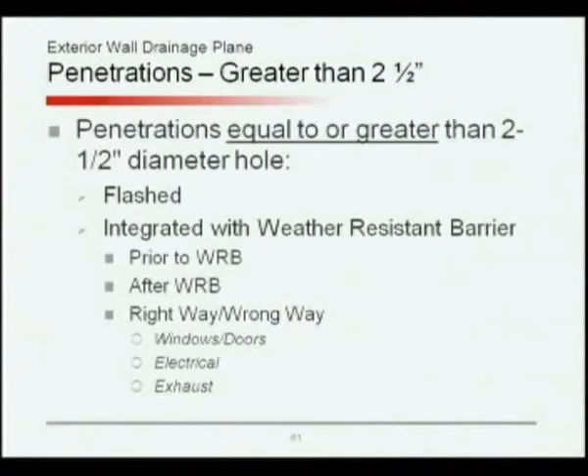So we're talking about things like exhaust fan terminations, where maybe you got a piece of 4-inch round coming out of there. There are flashing products that are made for that. Our standard says use something. Use something more than tape or caulk when you're putting that big of a hole in the wall.

Integrated with the weather-resistant barrier. So if you do it prior to the weather-resistant barrier, great. The weather-resistant barrier guy's got to go around you. Not usually the reality, because the house wrap goes on with the rough framers. So it's everybody else coming cutting holes in his stuff, and it's got to integrate with it. After the weather-resistant barrier, you got to peel it out of the way, do your thing, lay it back down.

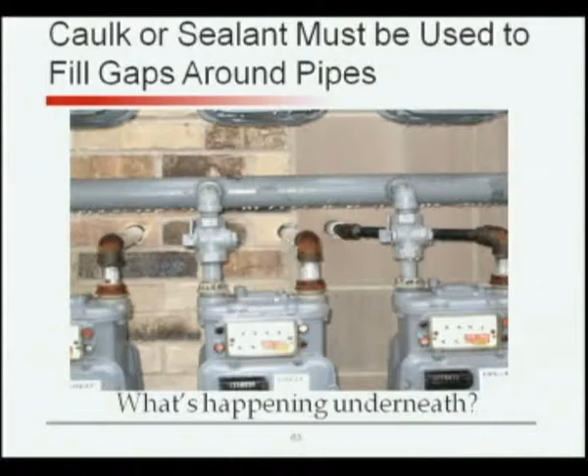Here's a multiple manifold gas system, probably a multifamily unit or a commercial building. Get some sealant on those things. Here again, some penetrations in an EIFS or stucco system. Pitch to the outside, caulked in place. That might be a 2.5-inch hole. These photos, yeah, February 15th, 2006. We've gotten this all under control since then.

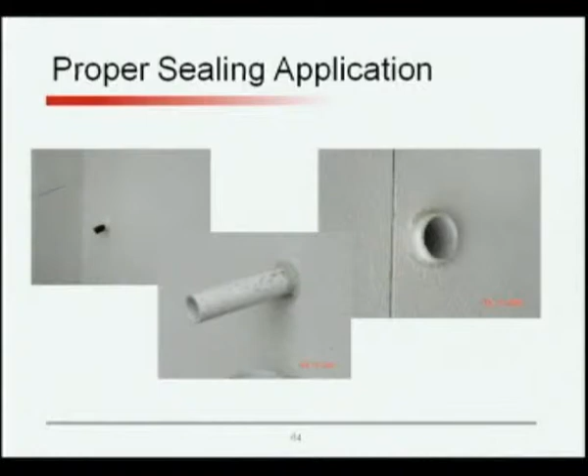So, classic. I'm cutting in a box for an outside outlet or something else. What's the easiest way to cut Tyvek? Hammer claws, man. Right? It's the most effective tool for cutting a house wrap. You know, I'd be thrilled to see somebody take the right tape and get a circle of tape around this thing. Incidentally, we're seeing tons and tons of fairly low-grade caulks and sealants being used now to control air infiltration at these spots with huge impact.

I'm amazed when I go into a new home that's under any kind of an energy certification program, Energy Star, or I can't even remember the other one, how much sealing we're doing. Not only where the boxes penetrate through the exterior wall, but then in the little knockouts, the little tabs where the wires go into the boxes. We're greasing all those things. I mean, it's cheap painter's caulk.

You're using it for air infiltration, but I'd be thrilled to see this thing pumped full of a nice high-grade sealant and then something done to make that weather-resistant barrier flow smoothly around that opening. Tears, tatters, holes slow the raindrops down, increase the likelihood that the raindrops are going in instead of flowing smoothly to ground. This is not a plane.

Flashings, we all know about drip caps over window and door heads. We also most of the time see them on the outside of the weather-resistant barrier, not on the inside. And most of the time we're just doing them because we think they must look really nice. They don't really look nice. They're there, again, for water to hit a horizontal surface and have a chance of running over the edge and being directed to ground. If this is on the outside, you just increase the likelihood the water's going to go behind it. Now it's in the door assembly.

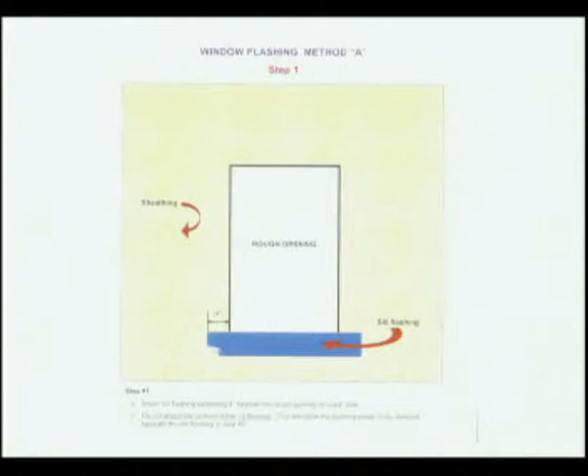Okay, here's some fancy slides on putting windows in. And again, it all goes back to this, not this. So, this is actually before the weather-resistant barrier goes on. You'll notice this did come from Texas. And most of the job sites I've had the pleasure to visit in Texas, house wrap's the last thing. Goes on as a specialty trade all unto itself. This stuff is already done.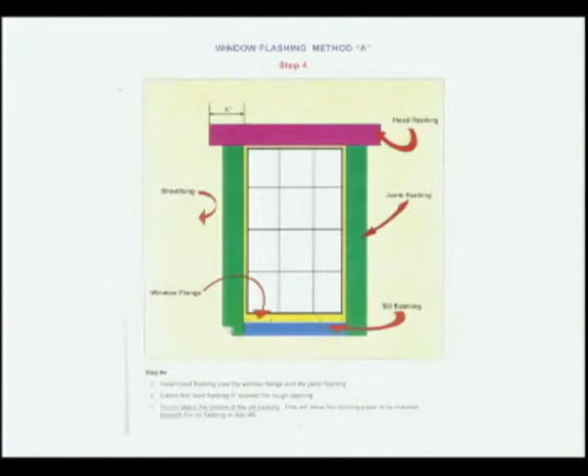Then the sides, I'm still shingling properly. And then the top, again, proper shingling here. Now this is before a weather-resistant barrier, so finally the weather-resistant barrier is going to come and shingle over the top of this.

Building paper applied over sheathing, bottom up. Here it comes. They're showing again black paper. They used a lot of black paper in Texas. And a lot of times you're not seeing sheathing. At least the last time I was in San Antonio 2 years ago, no sheathing. Felt paper right on the studs. Siding right on the felt paper.

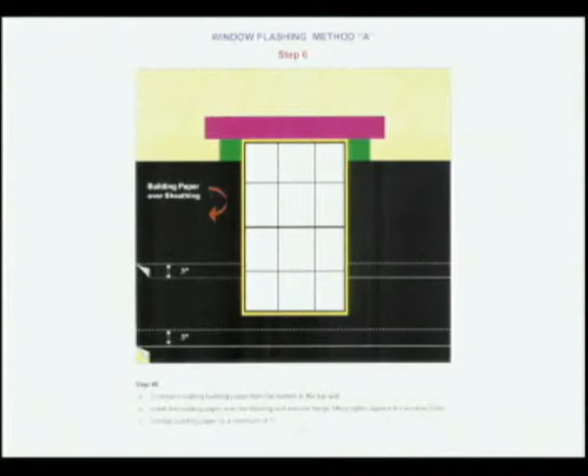It's Texas, man. This is after the building paper is applied. Once again, most of us are using our framer to put the building paper on, so this is the world we live in. And most of us are using the framer to put the windows in too, incidentally, so at least that person can get these two processes correct.

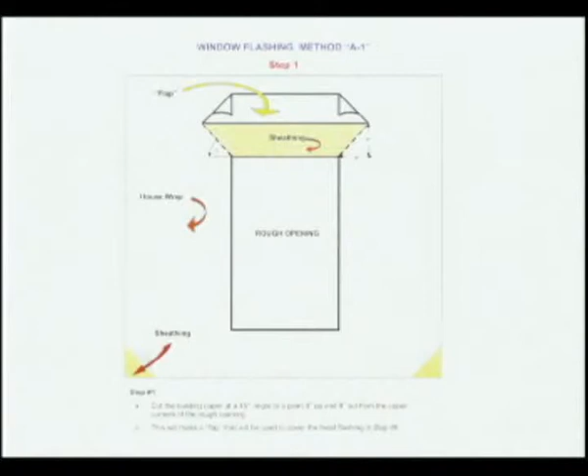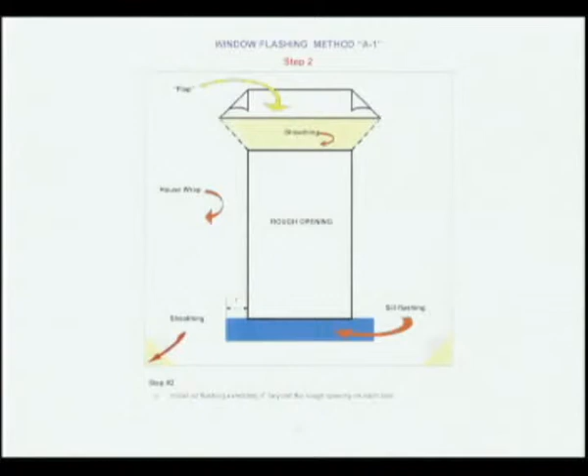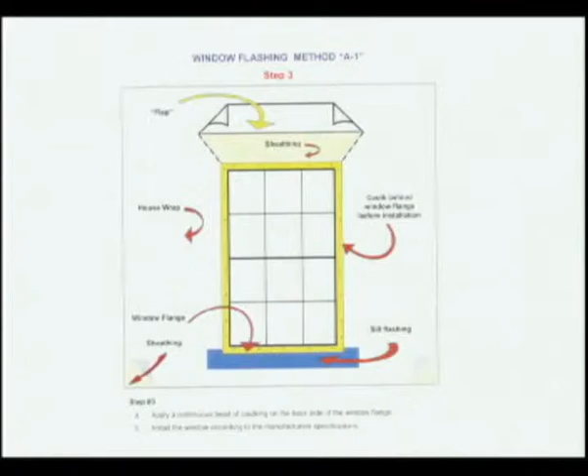Window unit in, overlapping, properly shingled, caulk behind the window flange, sides, top, flap the flap down. Just tape these ends so it doesn't blow away before your siding contractor gets there. See, you got proper shingling going all the way, maybe except for right there, you wouldn't have proper shingling. Again, this is all compromised.

People ask, what's the perfect wall system to build in Wisconsin? I said, get the weather to stay 72, 12 months a year, and I'll tell you what it is. But otherwise, we're dealing with changing conditions. It's all compromised. You're doing the best you can. But you're understanding the physics that go into it.

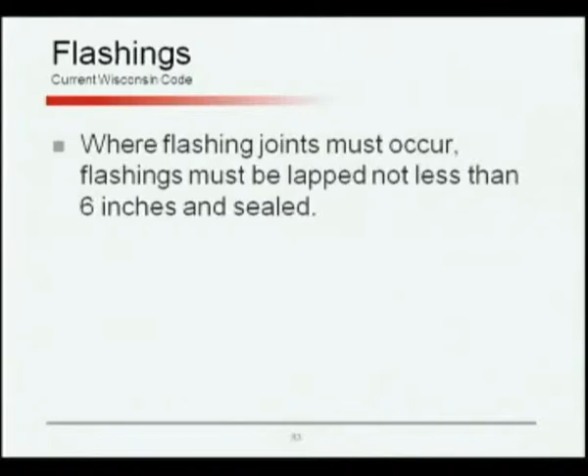Where flashing joints must occur, flashings must be lapped not less than 6 inches and sealed. This sure sounds like code, doesn't it? It's not code. It's our attempt at giving some guidance and some prescription for best practices. You saw that picture of that piece of gutter apron, lapped 6 inches. Continuously at the top of all exterior door and window openings extending horizontally past the frame at least 1/8 of an inch on each side.

So if I've got a door that's a 3-foot wide door and it's got a piece of brick mold over the top, they're saying I need a continuous piece of flashing over the top of that and going 1/8 of an inch past on each side. Now I'm going to run vinyl J channel around that. Well, what's my vinyl J do at the top at those 1/8 inches? I'd see those 1/8 inches cut and maybe folded down over the corners.

But that actually is a code right now. Current Wisconsin code says your metal's got to go 1/8 inch on each side past the projection. And a projection is anything that sticks out of your wall. So a window that sticks out of the wall, the cedar trim that sticks out that goes around the window, 5/4 trim sticks out of the wall, Fypon material, keep going. Intersection of chimneys or other masonry construction with frame walls have to be flashed now.

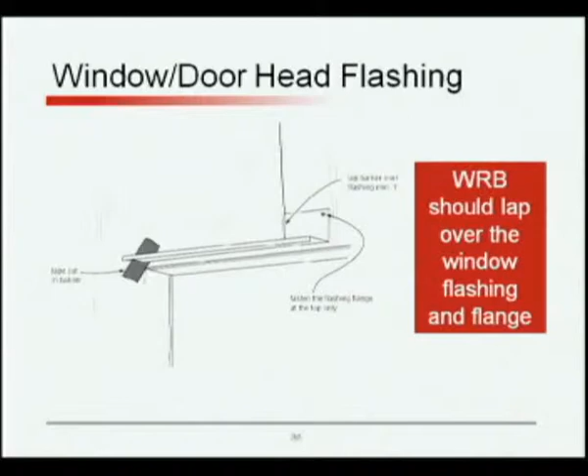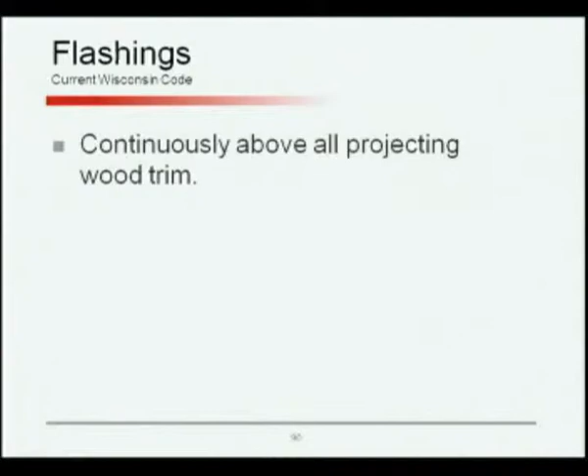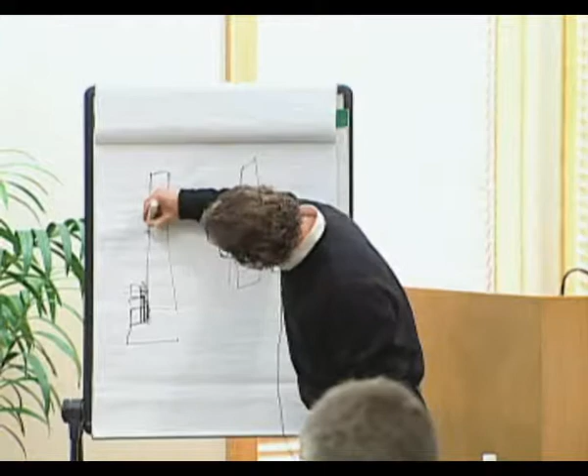Again, continuously above all projecting wood trim. So a belly board that divides first and second floors, any kind of decorative trim, anything that sticks out of the plane, again, that flat surface that we draw so well, anything that is attached to it and sticks out of it has got to have some sort of a flashing.

I killed this marker by letting it dry up.

It's got to have some kind of a flashing over the top, and then ideally, again, our weather-resistant barrier is out over the face of that. You guys are getting this. You guys are like, we know this stuff.

There it is again. Porches, decks, or stairs attached to a wall or floor assembly of wood frame construction. Got to be flashed. Okay, here's a ledger board for a future deck. Got my metal flashing over the top. Got my Tyvek lap down over it, real nice. Here's a little placeholder. Here's a block that this must have been the guy who was going to build the deck, because he put this block in place for later.

He can yank it out, and now his decorative skirt board that goes on the deck can fit right in there. So the siding's going to leave him the gap he needs. Well, that metal flashing should have come all the way out over that end, because that's going to be wood later. So some nice forethought, almost. That's what we said, deck ledger board almost properly flashed.

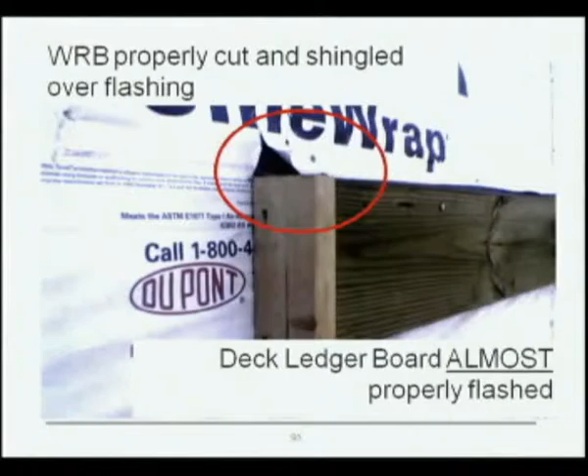The weather-resistant barrier properly cut and shingled over the flashing. Nice job. I don't know how that's fastened to the skirt, but we'll deal with that later. Need a flashing here. Oh, it's coming later. So some sort of a metal drip cap down over the tops of those joists, down over the top of that ledger board, and then a weather-resistant barrier over the top of the metal. I hope that's going to happen.

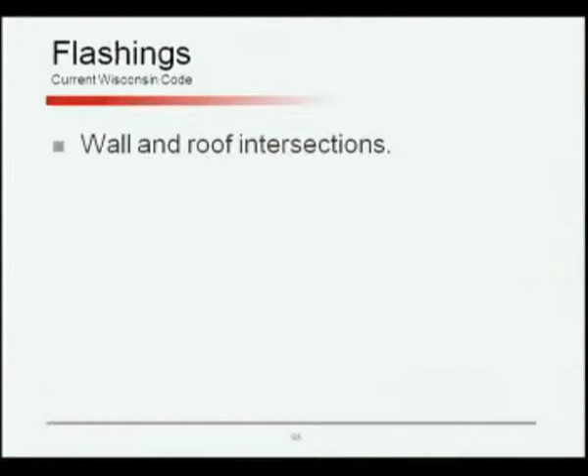Wall and roof intersections. We talked about that. Built-in gutters. Okay. This is the last slide.

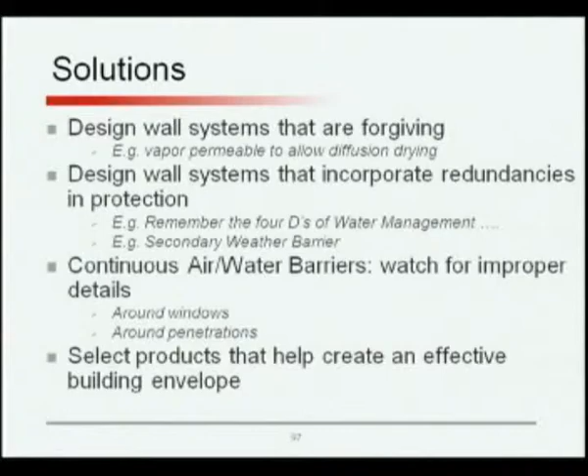How are we doing on time? Oh, my God. Everybody's still awake? Smells like lunch is here? Okay. Are you taking this one or am I doing this one? I do it? All right.

So, design a wall system that's forgiving. Again, figure on water going behind the pretty stuff that you see from the road. Just figure on it. The inspector says don't insulate till you put the siding on. Say why. The siding is not going to keep the water out of the wall. Design redundant systems. Design belt and suspenders type of systems for water.

The problem is, again, the old drafty wall with no insulation in it probably was getting wet every time it rained. But we ran our old inefficient heating systems inside those structures, and that heat went where? Right out through the wall to the exterior, and it dried that moisture out. And the wall sort of didn't care, because as soon as it got wet, it got dry again, because the wind was blowing through it. Today, we don't do that.

We build a very tight wall. We pack it full of fiberglass insulation. We put a vapor barrier on the inside. We put foam sheathing on the outside. Now when water gets in there, it's sitting there in the dark, perfect conditions for a mushroom farm. That wall's cold. Think about that. We talk about what's the temperature inside a wall. Well, the best insulating wall is cold inside because the warm part is in where the people live. So that wall's cold inside.

So moisture getting into a cold, dark place, what happens? We all know, we saw it in the basement. Cold, dark place and water grows mold. So you've got to be really vigilant to keep water from ever getting in that wall assembly in the first place. Design redundant systems. Let diffusion drying happen where it can. Redundancies in protection. Remember the 4 Ds of water management.